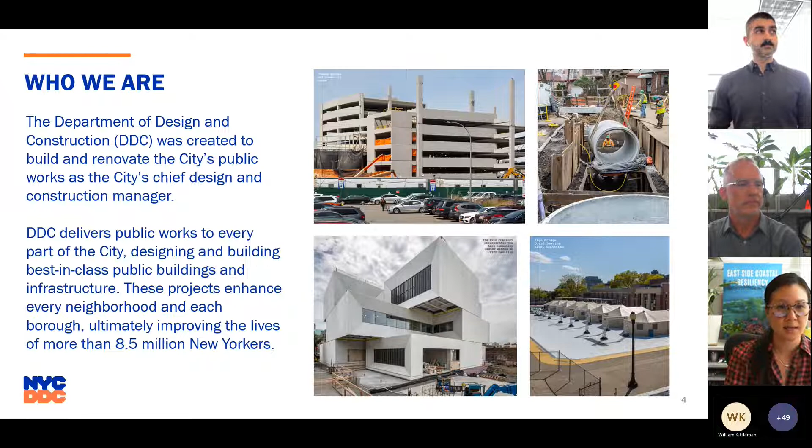What you are probably most familiar with is that we manage consultant designers and contractors to build city projects in New York City. And I think that's kind of what the bulk of our efforts are for DDC in New York.

This is our up-to-date agency performance snapshot, just to really let you all know, our sponsor agencies are mainly DCAS, DEP, DOT, Parks, MOR, and for fiscal year 23 alone, our construction budget is close to $2 billion. But I think what you don't know is that we're made up of all these different delivery types of our projects. This is just a snapshot of our portfolio, how we measure those metrics, and the process that we get from beginning to the end.

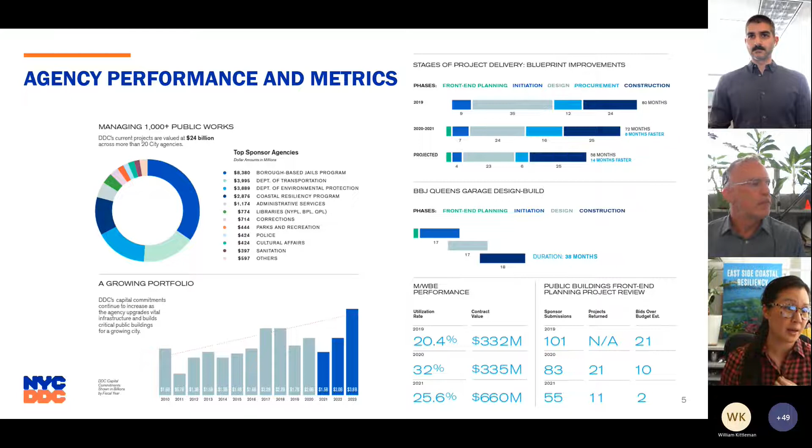I want to highlight that we deal with every small and large project. I think what we all know are just the large projects, but I want you to see that we have front end units, we have MWBE operations. So much goes into one project, but consultants and designers only see us, our designers. I want you to know we have all these other units we work for—PM, front end planning, public buildings, budget, everything. We all really work comprehensively together, which gives us this snapshot.

For the next slide, what I want everyone to know is that DDC, not officially, but we have ready a blueprint that we're able to produce that really focuses on streamlining project delivery here at DDC by expanding our toolbox for procurement, from beginning to end, working through all of our units internally to improve the process with the designers and our other city agencies.

This blueprint describes strengthening our industry opportunities for MWBE firms, and DDC is only able to capture this by looking at our past and present projects, and also looking forward to our future projects.

As you all know, Eastside Coastal Resiliency was a direct response to Superstorm Sandy that happened 10 years ago. This year is the 10-year Sandy anniversary you may be aware of. I don't think we would have gotten where we are today without DDC learning every day through that process. We've been forced to really be flexible, and this blueprint captures that efficient initiative we're trying to push through.

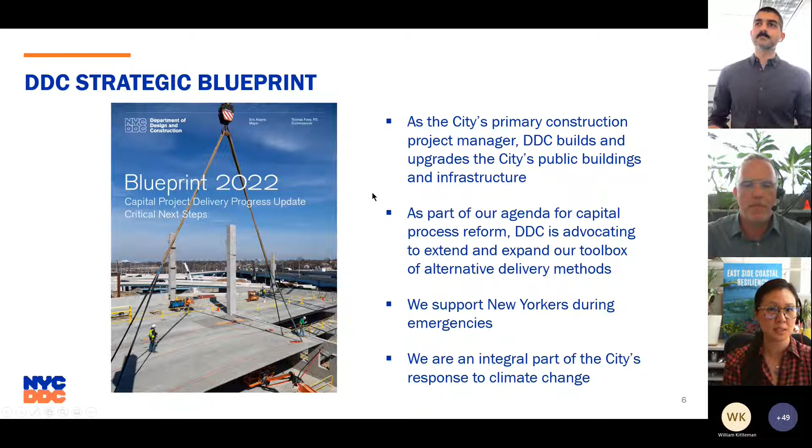And then I'd like to pass it on to Q to really describe our portfolio and how we're implementing that throughout. Thank you.

Great, thanks, Tuan. Hi everyone, my name is Q Amiri. I'm with the Department of Design and Construction, Coastal Resiliency Unit, Deputy Director for Design and Community Engagement, here with my colleagues. I'll quickly go through our active portfolio that we have right now.

A couple of the projects are in the pipeline, but this is what we're working on in our program, and Eric is going to dive deeper into the Eastside Coastal project in a couple minutes. Just a quick overview, we have 5 active projects, starting with the East Side project.

As Tuan mentioned, this was the inception of our unit, and our program and the rest of them followed suit. Brooklyn Bridge Montgomery, BMCR, is the tail southern end of the East Side project. On the northern end, we're in early stages of the Bellevue campus coastal resiliency in Manhattan, and we also have a flyover bridge that connects two different areas of the East Side coastal. That was a result of the East Side project—I'll talk about that in a second.

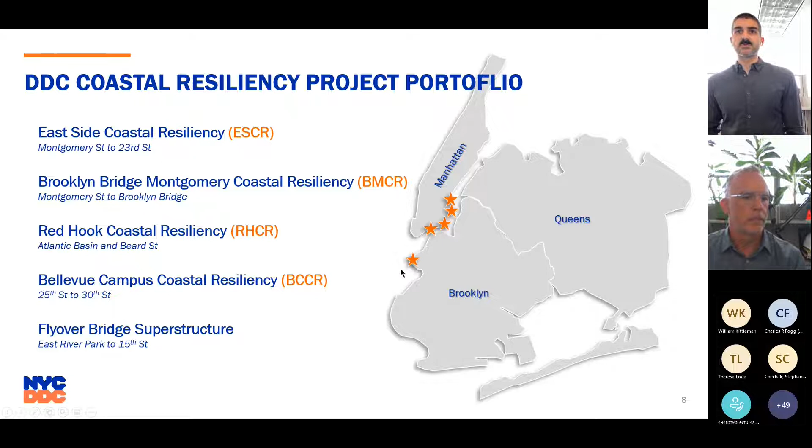And we have Red Hook coastal resiliency, obviously in Red Hook, Brooklyn. Really quick info cards on them—again, Eric is going to dive deeper into this. All of our projects in our program have some amount of federal funding, either from FEMA or from HUD, and they all come with a lot of attached strings we have to follow, a lot of requirements and protocols to make sure we comply with the requirements of the federal funds.

And there's typically timelines and deadlines associated with all that for deliverables, so we have to run a very tight ship with our projects. East Side was our first sort of baby of our program, and we have a lot of lessons learned here.

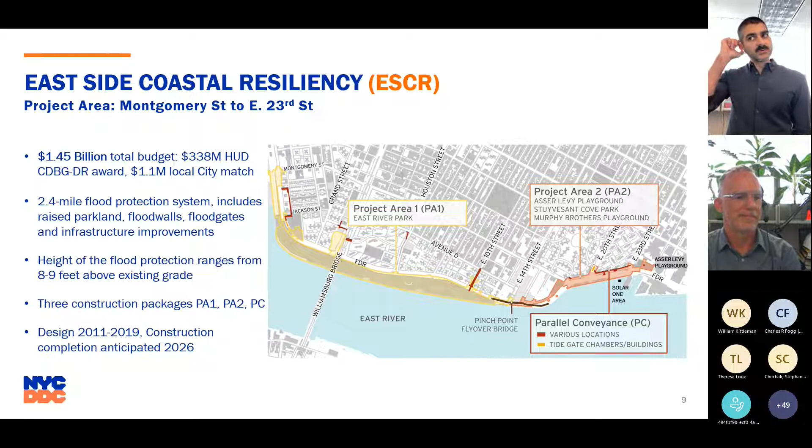One of the biggest major city construction projects in decades, it's a 2.4 mile stretch on the east side of Manhattan, stretching from the lower 20s down to Montgomery Street and Lower East Side. Project budget is about $1.5 billion of total design and construction. We have about $338 million from a HUD award, and the rest is a city match of city capital funds. I'll leave the rest of these details for Eric's slides, and he'll walk us through more of these nuances.

The next project we're working on just wrapped up design about a year ago, and the design phase was finished by our sister agency, Economic Development Corporation, EDC. This is the BMCR project. We were involved in the design phase with EDC, but it transferred to our agency for construction. We just finalized our procurement phase, and now we're ready to award the notice to proceed to the selected contractor. This is a little over $500 million project budget, with $172 million from HUD, similar to ESCR.

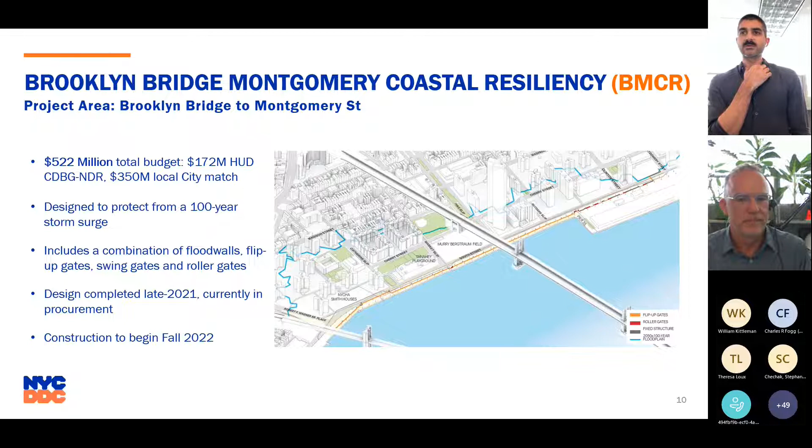This is a HUD-funded project, and the rest is city capital funds. We're designing to a 100-year storm surge, and the majority of the project is flip-up gates, some flood walls, and some swing gates as well. We're anticipating breaking ground in the next few months, either side of the turn of the year, hoping to wrap this up in 4 years' time.

Next project is Red Hook Coastal Resiliency. This is right now at 90% design, with DDC handling the design and construction. It's broken into 2 project sections, Atlantic Basin and Red Hook and Beard Street on the bottom left side of the screen. We have about $100 million for this project. This is FEMA funded, not HUD, but FEMA has its own separate requirements and strings that we need to comply with.

The feasibility study was led by the mayor's office a number of years ago and wrapped up in 2017. Once it transitioned to a capital project, it came to our agency for both design and construction. We're designing to a 10-foot flood elevation for this project. There's a lot of constraints in the built environment, and it's a very congested and heavy residential area with some industrial areas.

Obviously it's Red Hook, but because of the constraints we have, we weren't able to design similar to ESCR. We weren't able to go to 100-year flood protection, unfortunately. As part of this project, we're also incorporating the Brooklyn Waterfront Greenway, being extended from Atlantic Basin all the way down to Beard Street. We're hoping to break ground by mid to end of 2024, once we get through our procurement and ULURP phases in 2023, anticipating about a 3.5-year construction phase.

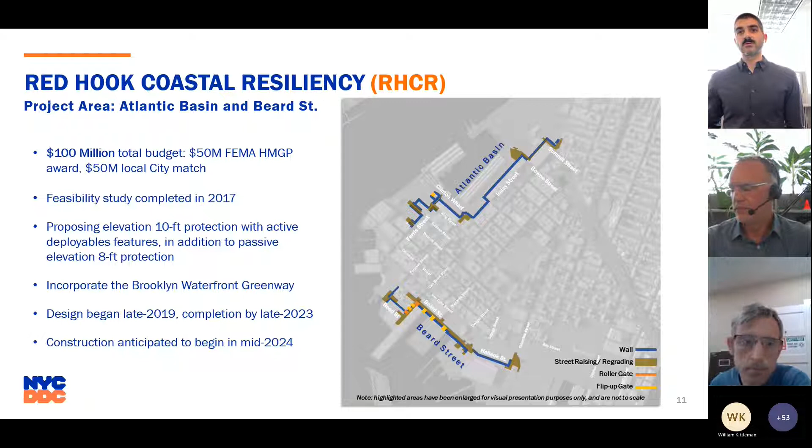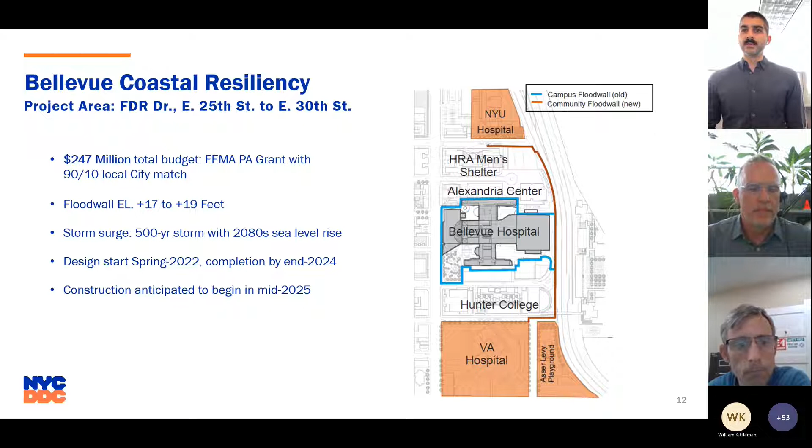Our next project is the Bellevue Coastal Resiliency. This is the northern end of ESCR, expanding up to 30th Street. It's a flood wall, early design stages, and we have FEMA funds for this project with a city local match. We're anticipating completing the design by the end of 2024, about 2 years from now, and hopefully breaking ground in 2025.

With that, East Side Coastal Resiliency, I'll hand it off to Eric to walk us through the details here.

Hi everyone, as Q mentioned, I'm Eric Ilevich, Deputy Director of the Coastal Resiliency team here at DDC. I'll give you a little project background, share how we arrived at the design criteria, show you some of the design, and some of the progress we've made in construction. I have a handful of slides, so I'll try to breeze right through this.

As Tuan mentioned, we're just about on the anniversary, the 10-year anniversary of Sandy. It was actually October 29th when Hurricane Sandy impacted the greater New York City area. It wasn't just a hurricane, it's also referred to as a superstorm.

The reason behind that, as you're maybe familiar, is that it was about 1,000 miles wide. The timing was such that it occurred at the highest tide of the month, a spring tide, due to the full moon. The pathway took an unusual turn, taking a direct hit into the New York City area.

The surge was pretty significant. Down at the Battery, at the lower end of Manhattan, was about 14 feet storm surge above grade at that location. The damage the city sustained was significant as well: 44 New Yorkers lost their lives, we had $19 billion in damage, and lower Manhattan was in the dark without power for a handful of weeks after that.

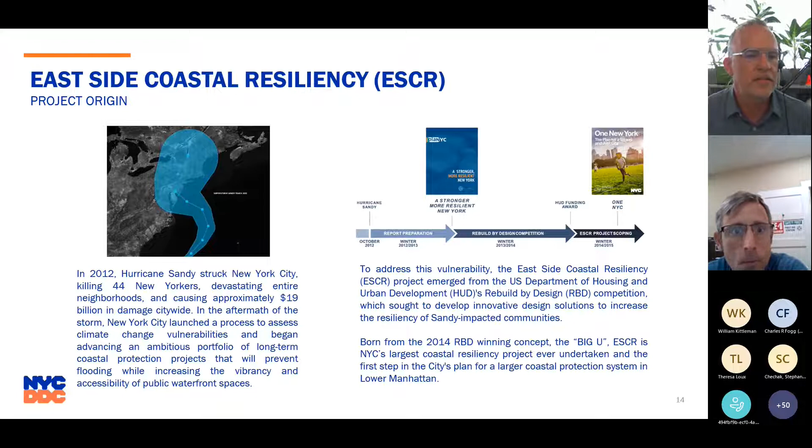This would be assembled in a series of compartments which would offer independent utility. These compartments were selected on natural pinch points — locations of the steepest grade, which provides the shortest distance to the tiebacks to high ground. So that's essentially the inception of the project itself.

So the first component, or first compartment, of the Big U is East Side Coastal Resiliency. Again, this is roughly 2.4 miles of coastal flood protection, starting on the left at Montgomery Street at the south end, up to East 25th Street at the north. This will protect about 110,000 residents, of which 28,000 are NYCHA, or affordable or low-income housing.

The system itself consists of flood walls, which are both exposed above grade, and then some that are actually below grade of a majority of East River Park. We're also doing floodgates, both swing gates and roller gates, at 18 different locations throughout the project.

There are also improvements to drainage. Not only do we want to address the issues from coastal flooding from the riverside, but we also want to manage any backups that would happen to the system or any rainfall that would happen. So we're doing drainage improvements in a package called the Parallel Conveyance Package, but I'll get into a little more detail later.

The overall goals of the project are to provide integrated flood protection first and foremost. We want to not only do that, but also improve waterfront access and open space. We don't want to just build walls and wall off the community from this resource. We want to respond quickly — this is 10 years already, but we're actually just in construction now. There were some timing constraints associated with the funding, which we've had to extend, but we're on track now. And then we also want to seek a FEMA accreditation; we want this site to be eliminated from the flood insurance rate map. So that's another goal of the project.

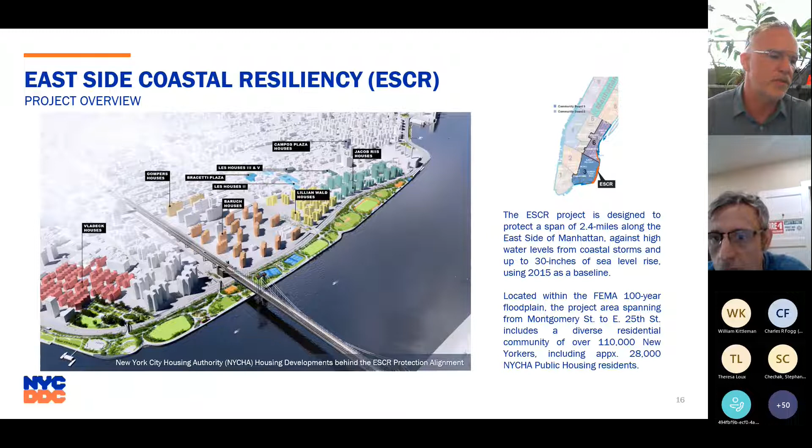So this is the design criteria for how we arrived at the height of intervention. On the left, you see the floodplain. Again, this is the compartment showing the floodplain. This is the 100-year storm in the 2050s.

We chose the 2050s based on the New York Panel on Climate Change projections for the 90th percentile, so only a 10% chance that in the 2050s we would have 30 inches of sea level rise. But that's equivalent to the same projections for the average for the 2100s, the 50th percentile.

If you look on the right, working down from the bottom, we have the FEMA 100-year still water. We add freeboard on top of that, plus sea level rise and a contingency, and we arrive at our height of intervention, which is 16.5 feet, NAVD 88. So that's a general overview of how we arrived at our height of intervention.

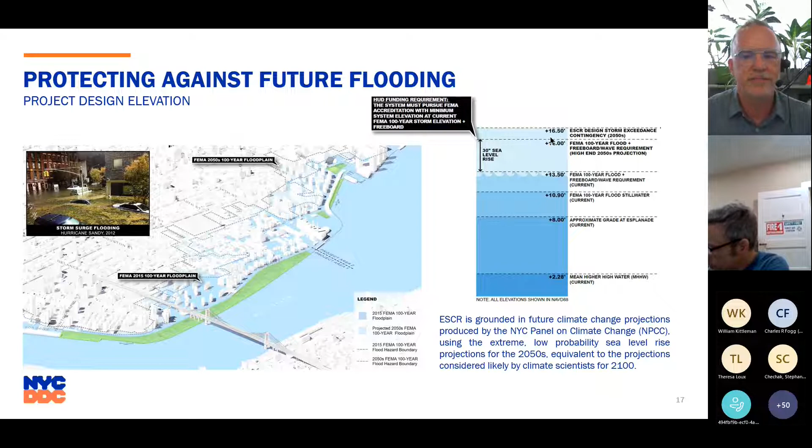This is a majority of East River Park, which will actually all be elevated. We're doing a new bulkhead and bringing in many 100,000 cubic yards of fill to raise the park out of the floodplain. In that case, the flood wall will actually be below grade, and I'll get into a little bit more detail there.

These are some images of the actual renderings of the project itself. This is project area 2. You can see 18th Street to the left, 20th Street is in the center of the image here, and 23rd Street is to the top right.

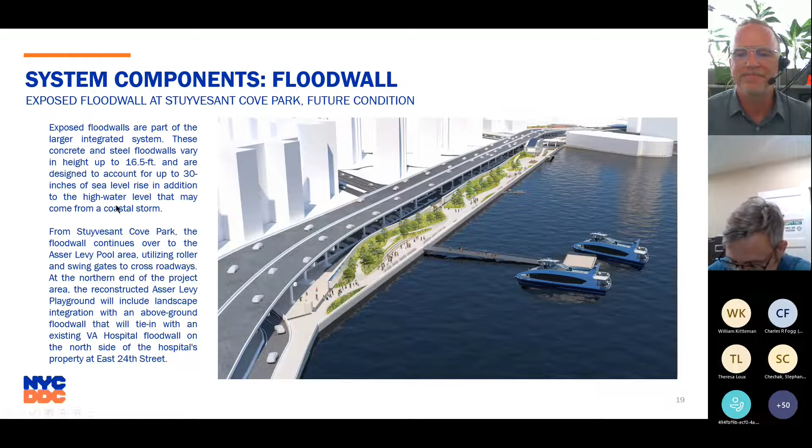As I mentioned previously, this shows you a cross-section of East River Park. The top image is of existing conditions. Not only the park, but the FDR and the community are susceptible to coastal flood. And when sea level rise happens in the coming years, the entire area will be more prone to frequent tidal inundation—it won't even take a significant storm or rain event for that to happen.

So for East River Park, we are actually raising the entire park. Working from the riverside back, we're doing improvements to the bulkhead. This flood protection line, this orange line, changes depending on where we would like to plant some trees. FEMA requires us to have a planting offset—we can't plant any large trees or shrubs next to the flood wall. So if we want trees or shade structures by the water, we need to bring that line of protection in, which is separate from the bulkhead.

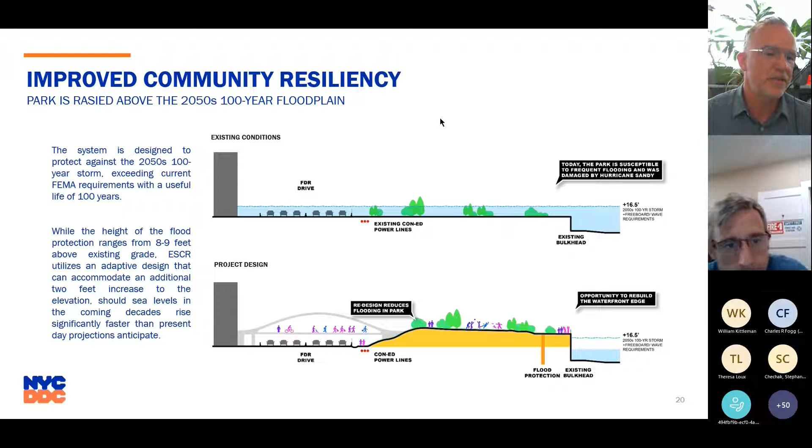One of the issues that was part of our constructability review were these Con Ed lines. Con Ed has a large generation station at 14th Street. They provide distribution to all of Lower Manhattan, and of course they use our park to do that. These are oilostatic lines—they're pretty stable, pretty much fixed in place. So we had to work around those, which was kind of a challenge throughout the design process.

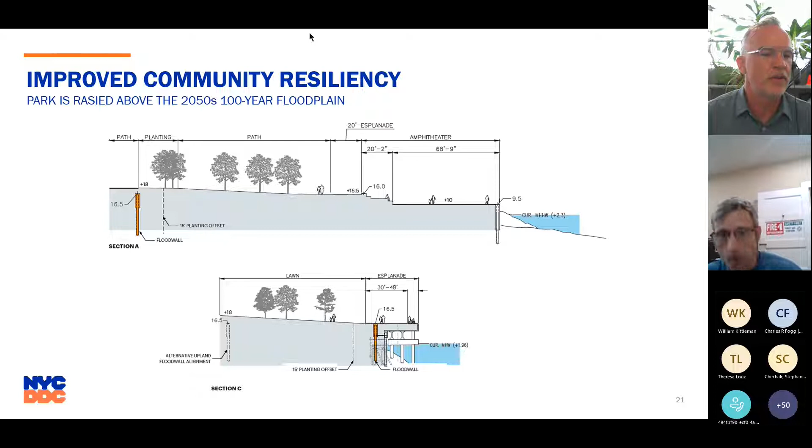This is a cross section of the flood wall. The top image shows where the flood wall is inland, taken at the amphitheater, so that line of protection is further upland, with the slope going down to grade and then to the river's edge. Where the flood wall is closer to the water's edge is shown in the lower image, and you can see the planting offset.

These are the toolkit of options for how park users will interact with the water's edge. Since we raised the park, we didn't want everyone to be 16.5 feet off the water, so we created different opportunities for the community to interact with the water at that raised grade, and also at the step downs or in the embayments. I have a close up of the embayment later too.

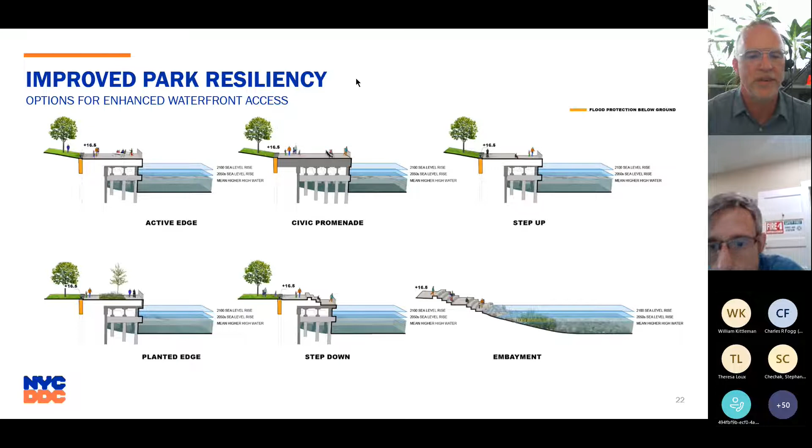Here's the embayment. This is an example of improved access from the city side. Currently, at the Houston Street intersection and the FDR, guests have to walk into the park and make a hard right or left - there's a block there. Now we're raising the park up to the same grade level as the overpass of the FDR, and folks can come down to the new amphitheater and new embayment at an elevated grade. The way we've changed the grade in the amphitheater and embayment creates a whole new, more inviting experience while also addressing coastal flooding.

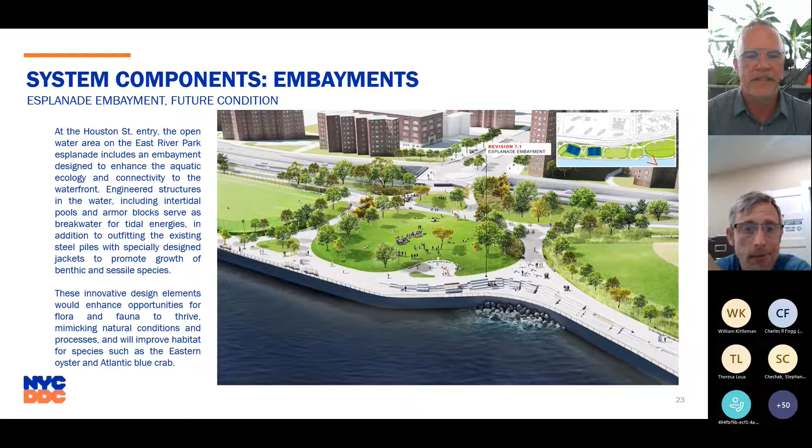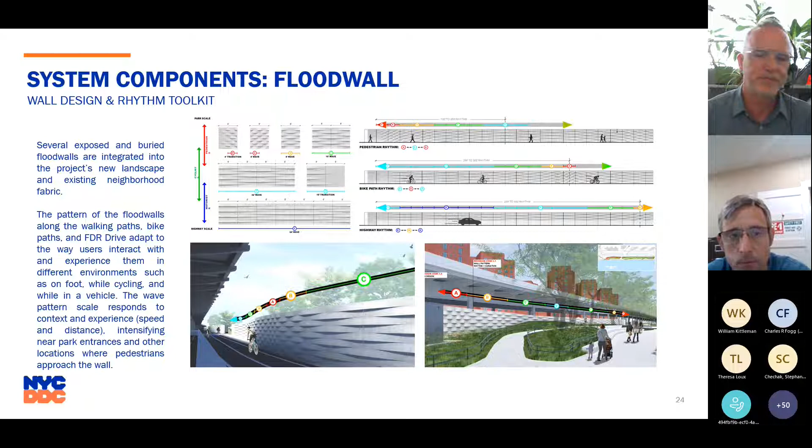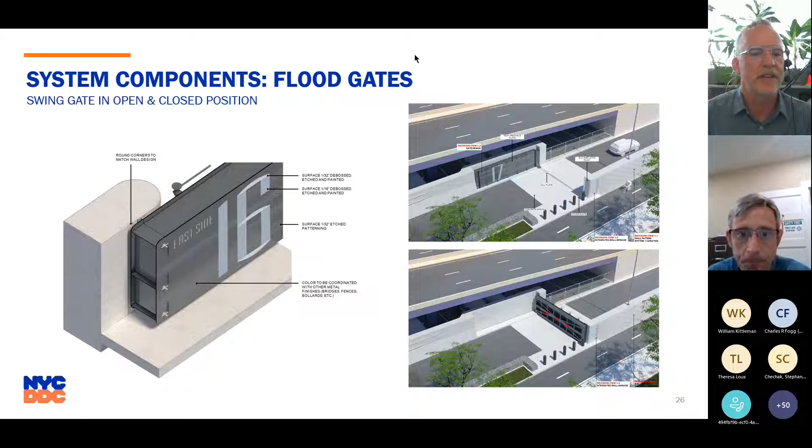So we'll take a closer look at the bridges.

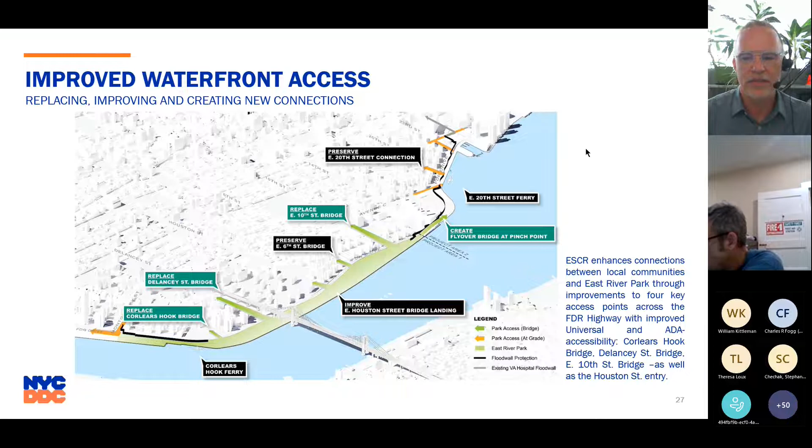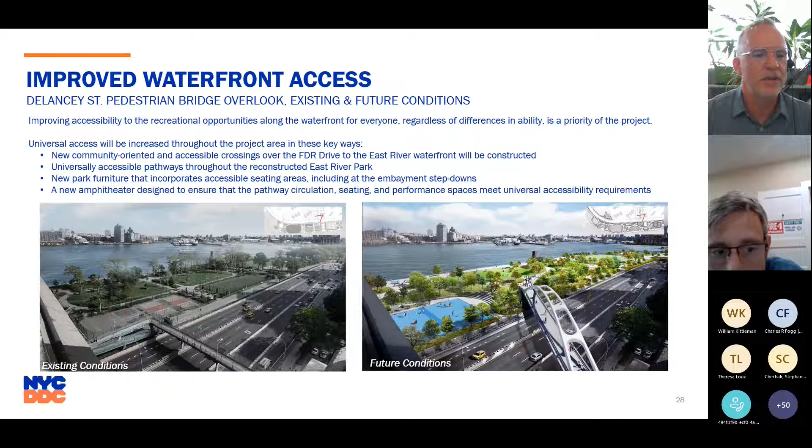Universal access was also a goal of the project, so our grades are at a maximum of 5%, and all of these entrances and approaches to all of our pedestrian bridges are universal access.

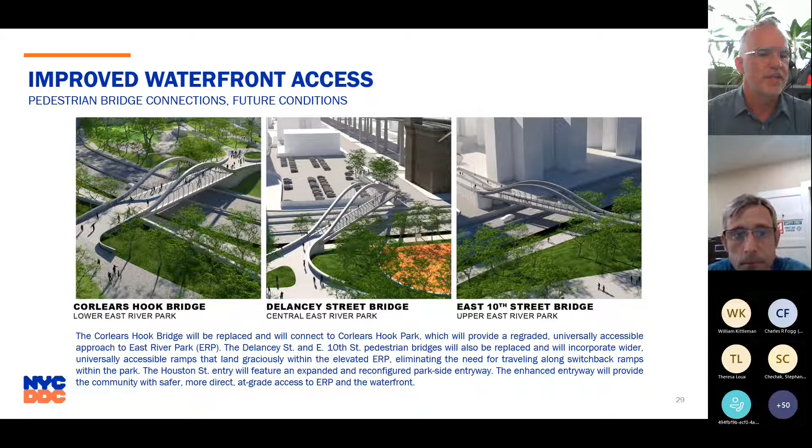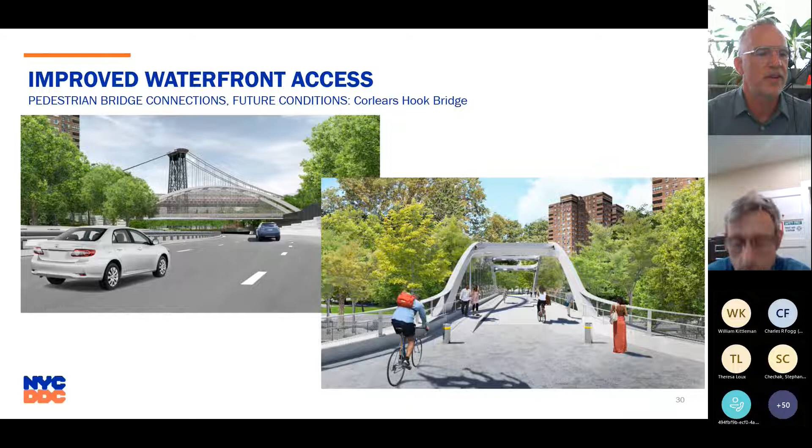This is the Corlears Hook Bridge, showing the tied arch. These are different images with the Williamsburg Bridge in the background. We're also doing improvements upland on the FDR side to make sure all of these pathways are universally accessible. We have an overhead image of this bridge on the next slide.

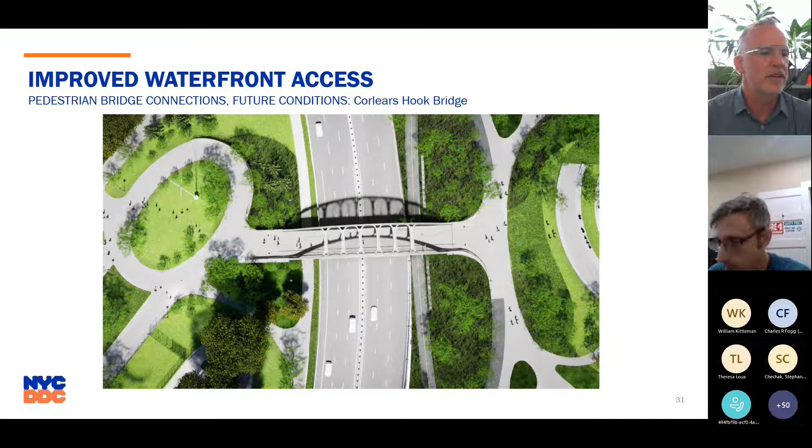East River Park is on the right. As park users come to the park, behind the amphitheater, they will be at least at 16.5 feet on NAVD 88. To the left, we changed the configuration of the landscape to create a universally accessible route from the upland side to the park itself.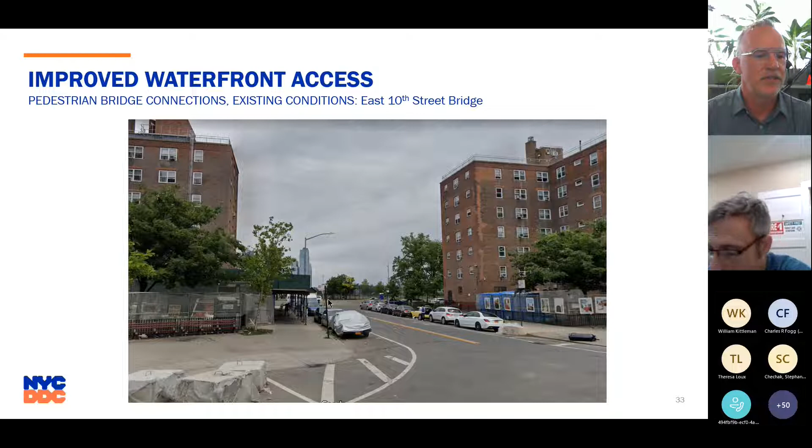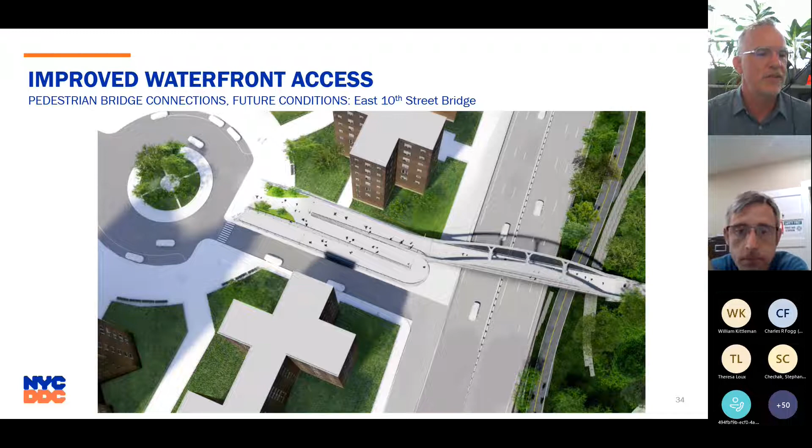So we have a rendering on the next image which shows you the new condition. This is universally accessible. We have a ramp as well as stairs and a new approach, and on the next image you can see that it is visible from the upland approach. This is a definite improvement over the existing conditions to improve accessibility.

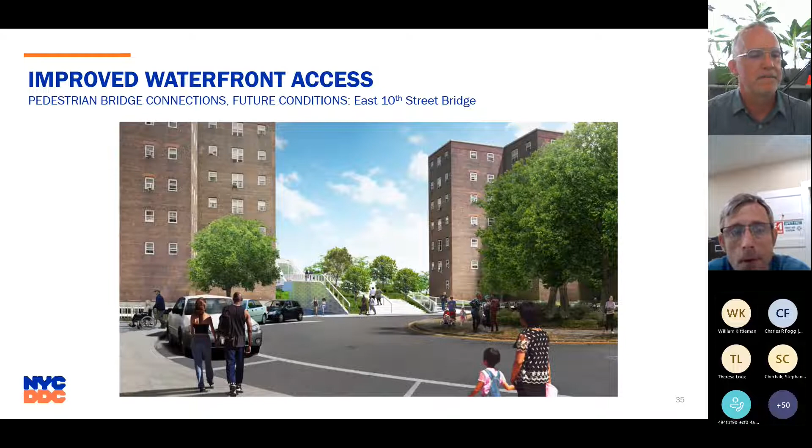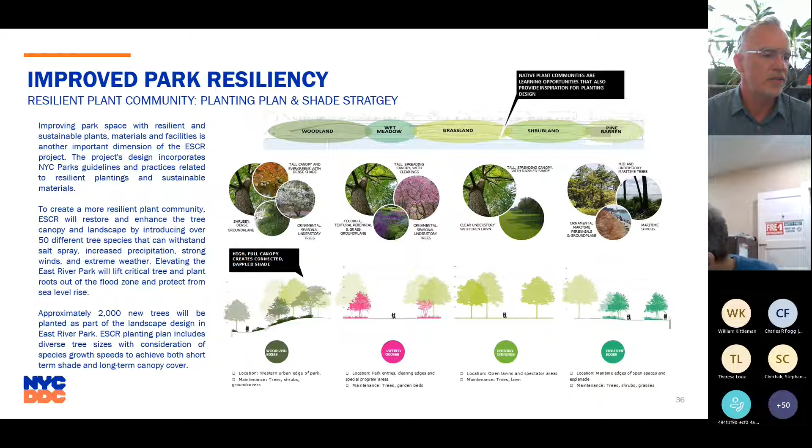This is just to give you a brief overview of the planting palette. This park, as it exists now, was designed in the Robert Moses era, and a majority of the trees there now are called London plane trees, not necessarily the best as far as saltwater inundation or saltwater spray. So the planting palette now, or that will be installed, has over 50 different species of both trees and shrubs. It's a much more diverse palette that is more resilient and at different growing speeds and levels, so that we're hopeful it will grow back sooner and provide shade as quickly as possible.

Just to show you some of the sustainable design, some of the park amenities we are including are called comfort stations, or also athletic facilities. The image on the left is of the track house, which includes restrooms, locker rooms, and concessions. The sustainable design has a green roof, glazed brick, and stainless steel components. They are robust, expensive, but they will last a very long time and be resilient. The color palette was chosen so that you could have wayfinding, with the color spectrum continuing throughout for each of these separate buildings in the project.

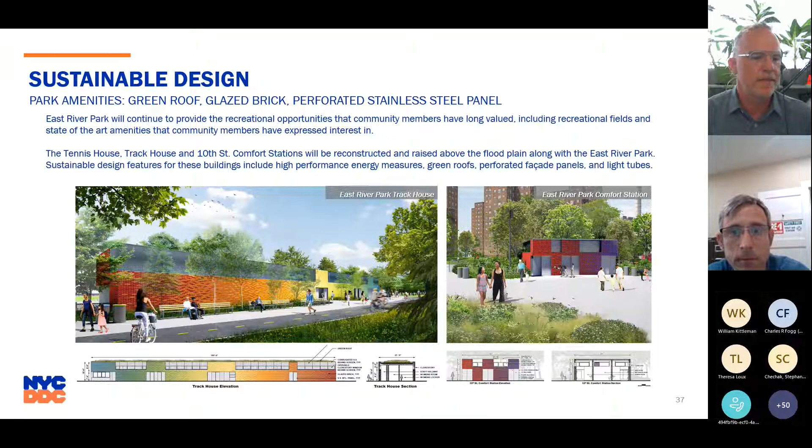Not only do we have public buildings, but also the parks maintenance buildings are also of sustainable design. This is a charging station for the parks vehicles. Just wanted to show you that as well.

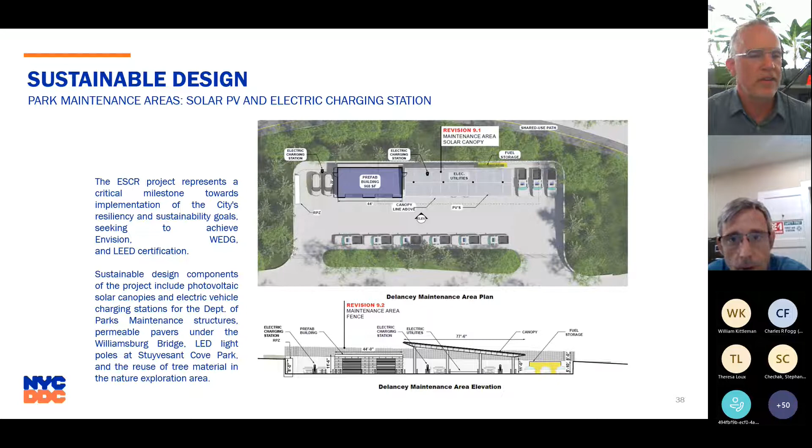We left no stone unturned for resiliency. I'll just do a brief overview of the drainage that I mentioned. The project is addressing upland drainage issues.

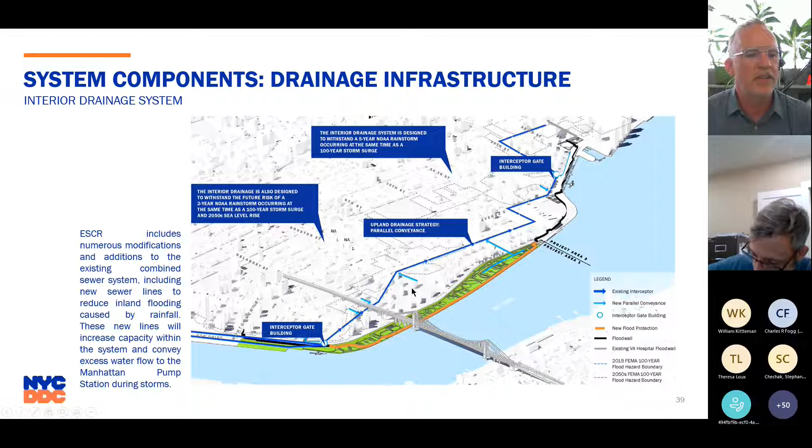In this image, we have this dark blue line, which is the existing interceptor sewer. We also have outfalls that, in case of an overflow to that system, drain to the river edge. The solution is to create a compartment in our system with these interceptor gates, which are chambers 40 feet below grade, operated by interceptor gate buildings at the surface level, which close off our compartment. Then we have these blue lines, which are new sewers, making improvements upon the actual system that's already there, adding capacity and getting the sewage quicker to those interceptors, which go to the Manhattan pump station and then off to Newtown Creek in Brooklyn.

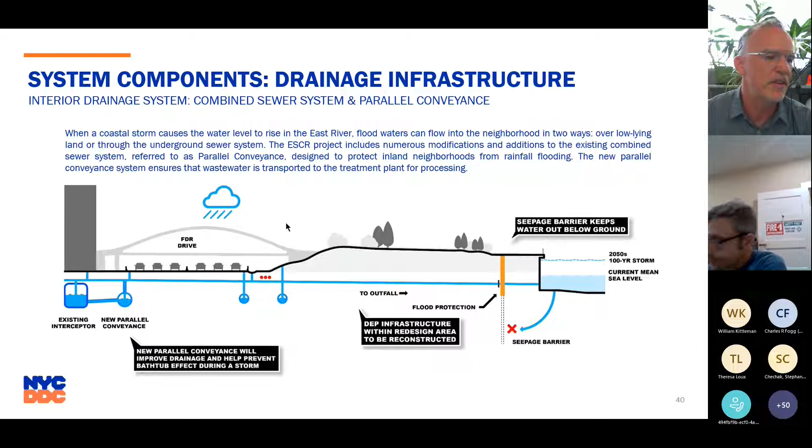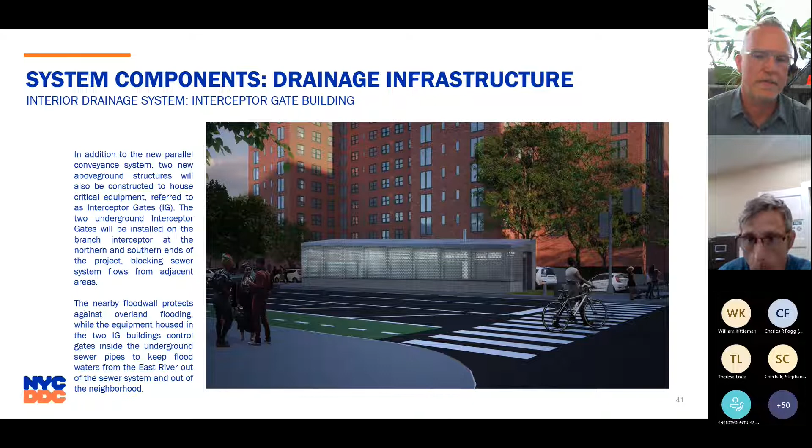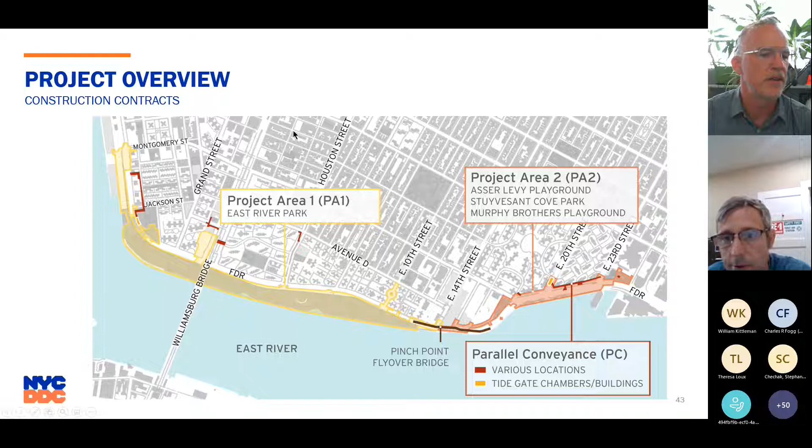I'll show you some images of project construction, some progress that we've actually been making. This is the image you saw earlier, depicting both Project Area 1 and Project Area 2, and the parallel conveyance, which is all in the darker red. So we'll first take a stab at Project Area 1.

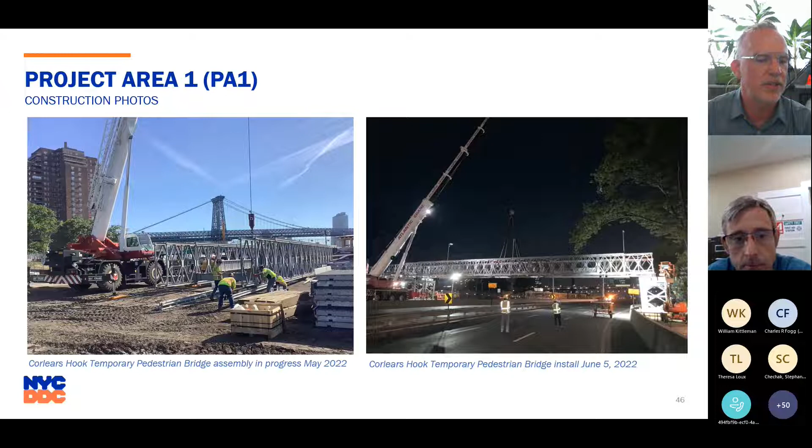We have an active ferry landing on the riverside in East River Park, so we wanted to provide access throughout the life of the project to that ferry landing. We were able to have this temporary bridge installed to provide access.

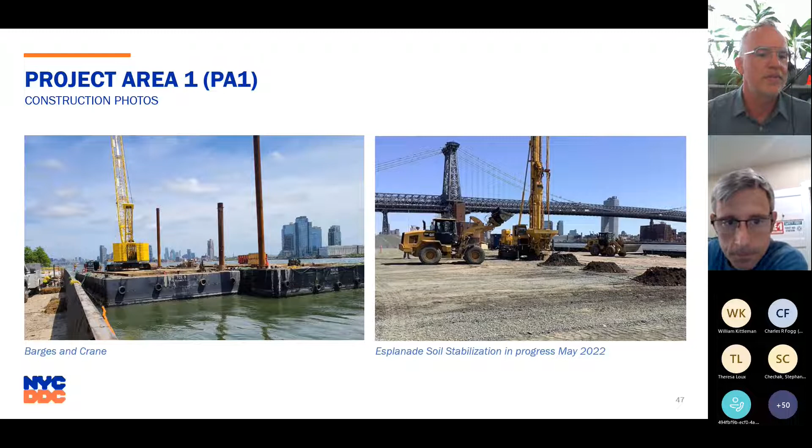This is just showing some waterfront work being conducted. We have barges on the left doing some of the removal of the esplanade. We also have some soil stabilization on the right. As I mentioned, we're going to be importing a significant amount of soil, so in order to speed up the settling process, we are doing stone column installation. We have some images of that on the next couple slides.

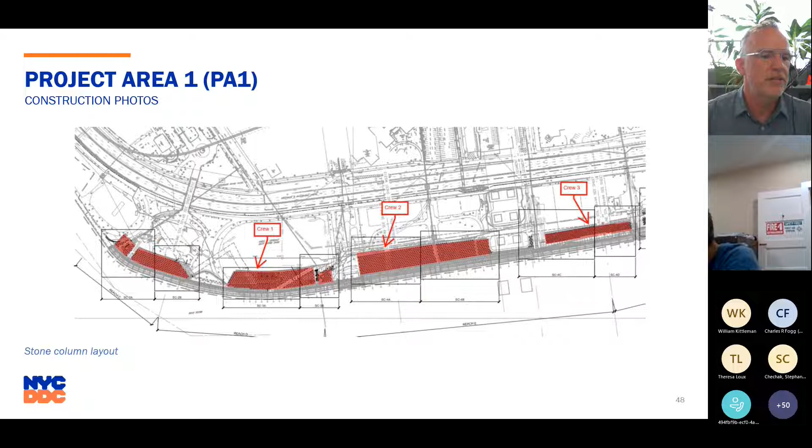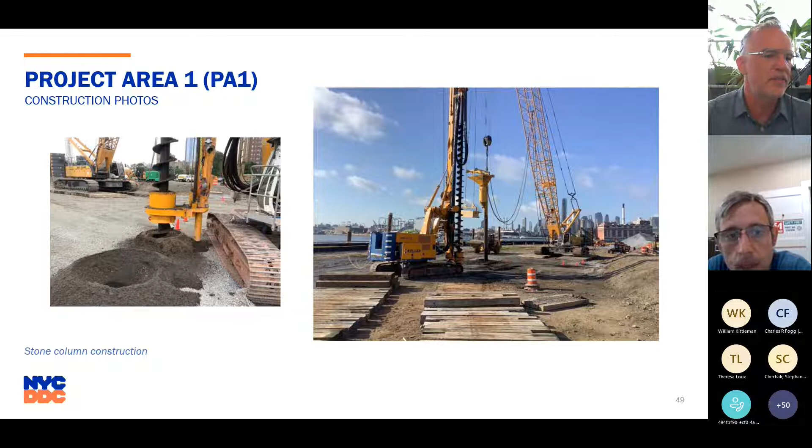These are all of the areas in Project Area 1. This is the first phase of Project Area 1 where we are doing those stone column improvements. The next image shows where we are drilling shafts, and then we have a system to drop stone material into that to stabilize or make the foundation stronger, so that we can add fill and improve our settling rate.

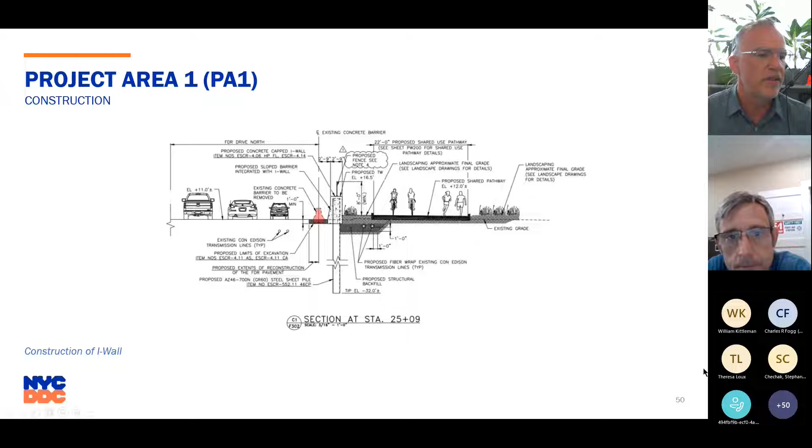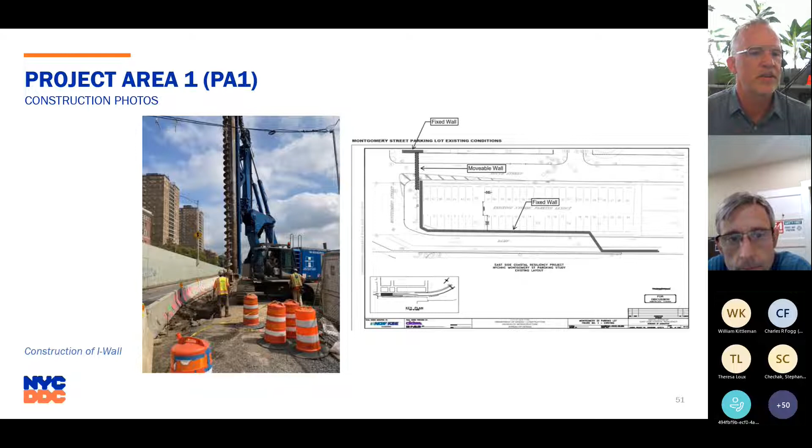We are also doing construction of the I-wall at the lower end of the project. We have a below grade sheet pile that provides stability as well as a seepage barrier. The next images show that installation happening, with sheet piles going in. The image on the right shows the location of this, at the lower terminus of the project at Montgomery Street and South Street.

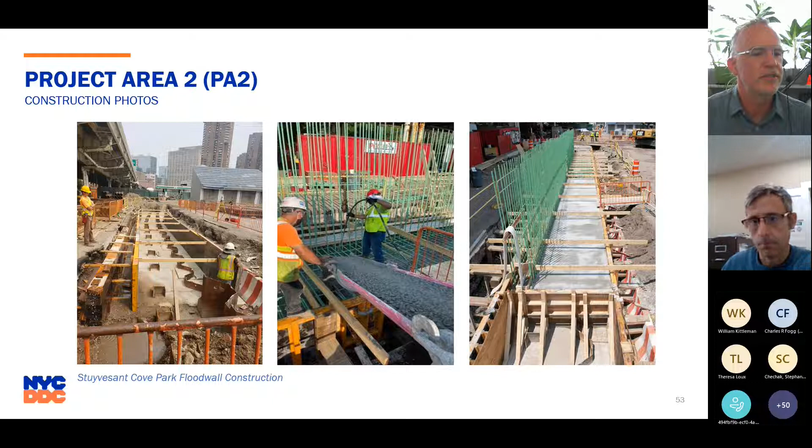Moving up to Project Area 2, this shows a little bit of the construction of the flood wall itself. You can see in the image on the left some of that sheeting, the sheet pile, as well as some eye piles. We have some concrete formwork going in the next images. This was completed earlier this year.

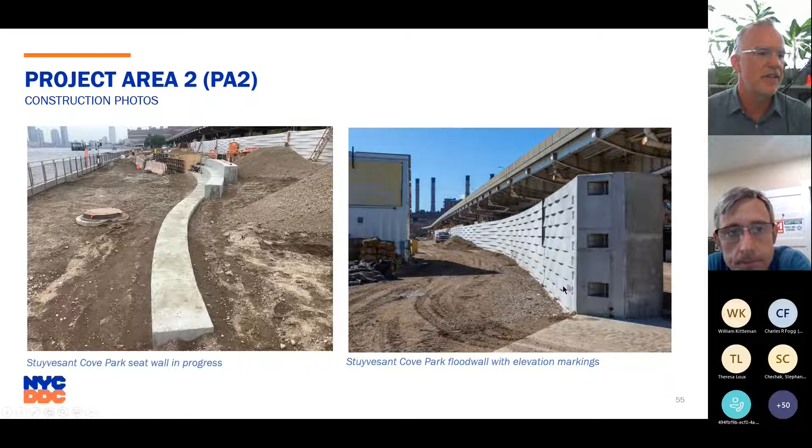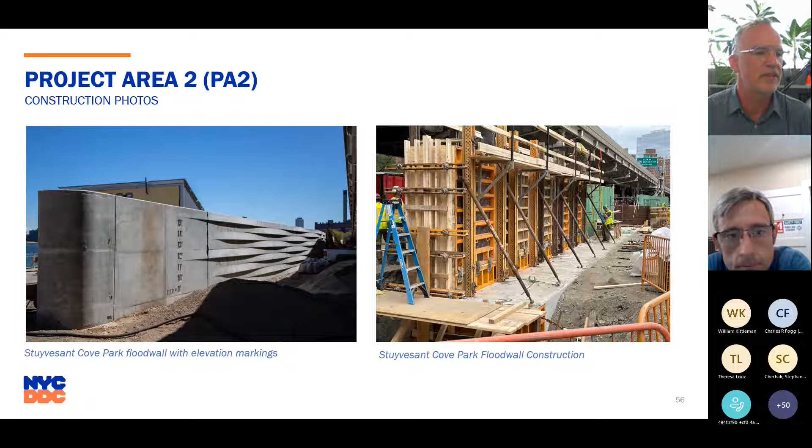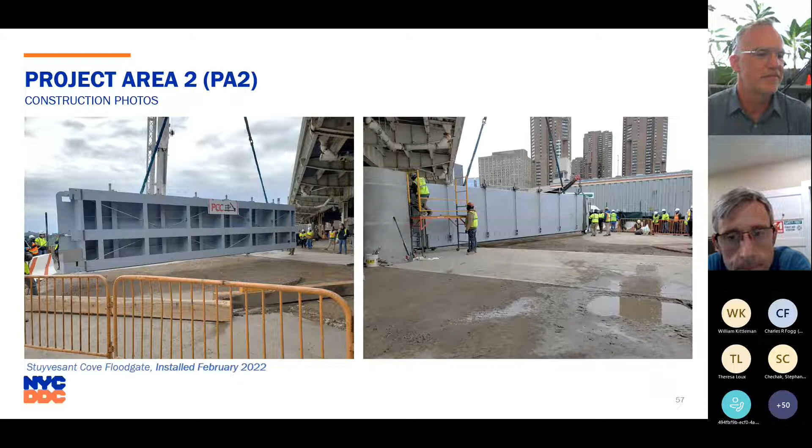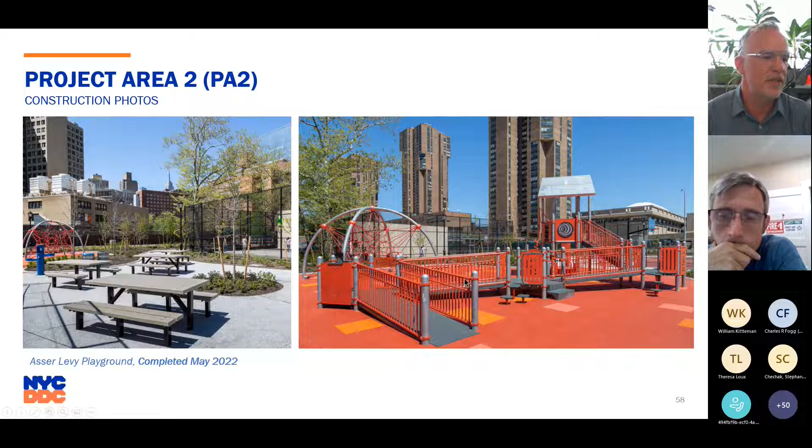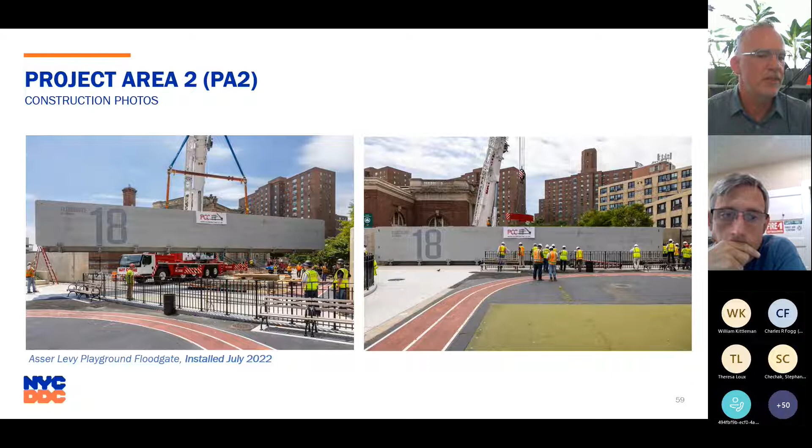Okay, and I believe that's it. So I believe we're open for questions if there are any.

So a question that I had was, I saw that you shut down FDR there for a little bit over a weekend outage. What kind of penalties were written into the contract if you guys couldn't open that back up?

That's a very good question. I cannot recall personally if there were specific penalties, but yeah, Tuan?

As you all know, it was a very long and lengthy process with DOT's OCMC group. In terms of penalties, I can't say specifically, but there was a lot of back and forth, and a lot of commissioner discussions, because when we shut it down, it was really for the demolition of the existing pedestrian bridges. It's not meant to set a precedent for other projects, but I think an argument can be made if the project needs it during construction.

Well, it's good to hear you don't know the penalties, because then it didn't happen and there's no issue. So I appreciate the response.

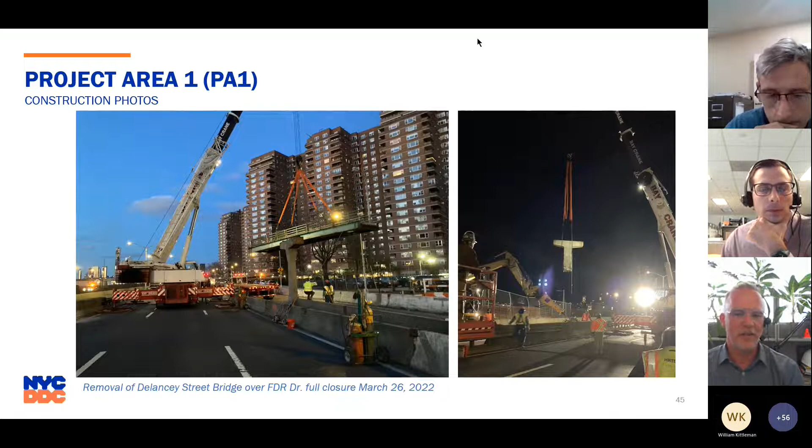We worked with all of our operating and owning agencies, DOT, DEP, and Parks. SBS and EDC are also involved, I'm telling you all these acronyms, but I don't know if you're familiar with all of them. We have operating agencies that we coordinated years-long meetings with about these 18 gates, working back from zero hour, which is 35 or 37 mile per hour sustained winds.

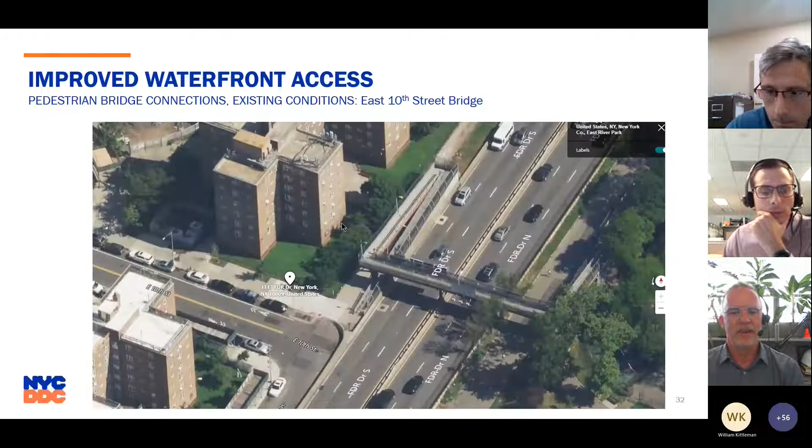That is considered zero hour. We don't want crews out there trying to close these large, essentially sails, that would be moved around by wind. So we would want the deployment team to have those gates closed by a certain number.

That's a very orchestrated plan working back from zero hour. Even 96 hours ahead of time, we may be able to close gates located in the park, for instance, that aren't necessarily needed for vehicle or emergency access. We do have 2 gates that actually close the FDR, so those may be selected to close at a later time, closer to zero hour.

That was an extensive years-long process where we worked with our consultants who held multiple meetings with all of our agencies, starting from an iterative process where we put some things down on paper to try to get everyone on board. At a certain point, not only do we have our operators, but we have to loop in the fire department, the police department, and emergency management. It was a pretty extensive process.

Did I miss anything, Tuan or Q? Okay.

Okay, so there's one more question in the chat here. Can you discuss any lighting after dusk, security measures, EMS locations, call boxes where streets are not close by?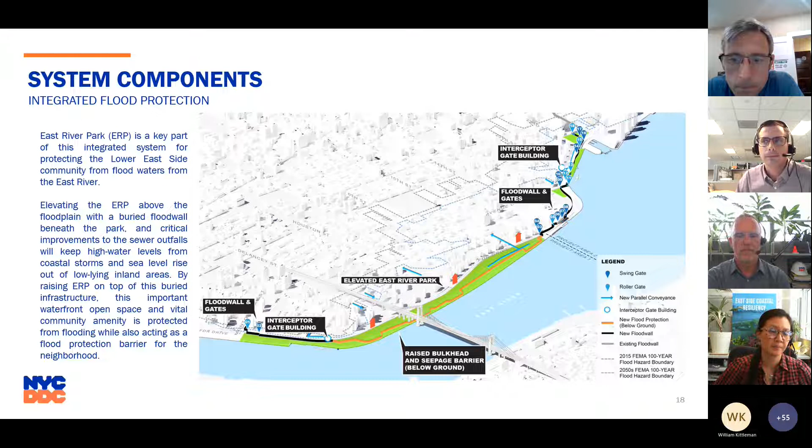There was one more question from Karen and Riley: what consultants assisted with design? It was AKRF/KSE JV that were the prime designers, but we had so many sub-consultants. For our environmental contract, it was AKRF/Hazen and Sawyer, Arcadis, Jacobs, MNLA, One Architects. Quite a few, all of them basically.

Big. Yeah, so I'll ask one final question. One thing I was thinking is when this program was developed, were there any places in the world that were looked at as an example, or is this a complete groundbreaking, paving your own path type of thing? One of our lead, sorry, go ahead. You're going to talk about Walter, right?

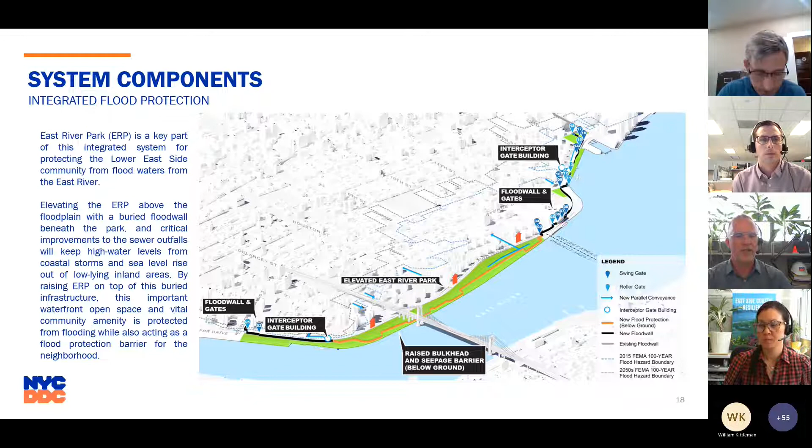Yeah, so as I mentioned, we're seeking FEMA accreditation. So when the project is installed, we are working with FEMA to have the flood insurance rate maps, or FIRMs, changed to remove this area from the floodplain. One of our engineers of record who is certifying the entire project, his name is Walter Balmy. He is from Arcadis, a Dutch firm that also has a large office in New Orleans. We were relying heavily on their expertise and experience to provide background, context, regulations, requirements, everything, because that's one of the project goals.

We were also able to tour some projects in the area. There was a riverine application in New Jersey that we went to, whose name is escaping me right now. We did look at some deployables there, some roller gates at a site in New Jersey, and I'm blanking out right now on that.

Which I would imagine what you are all susceptible to in Philadelphia there, along the river. Yeah, within the past year we saw 676 get flooded, so we saw some pretty crazy photos over that year.

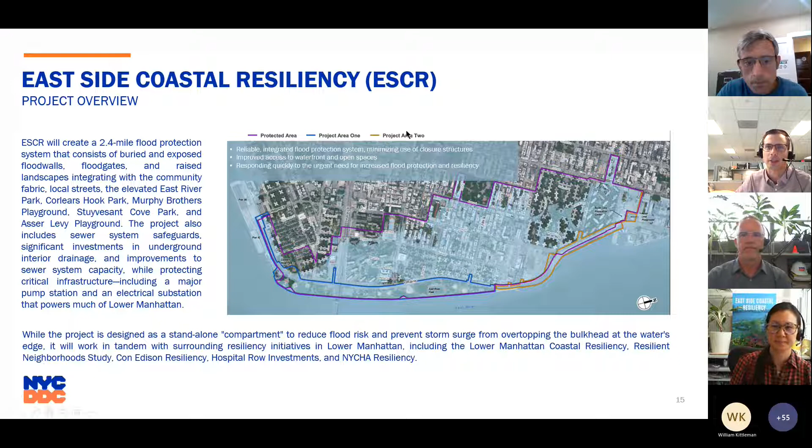All right, well thank you very much to Toulon, Eric, and Q for joining us today and giving such a good presentation. I really personally liked the formwork on the walls. I think Eric did as well, with respect to the speed of travel next to it and seeing a consistent undulation depending on your speed.